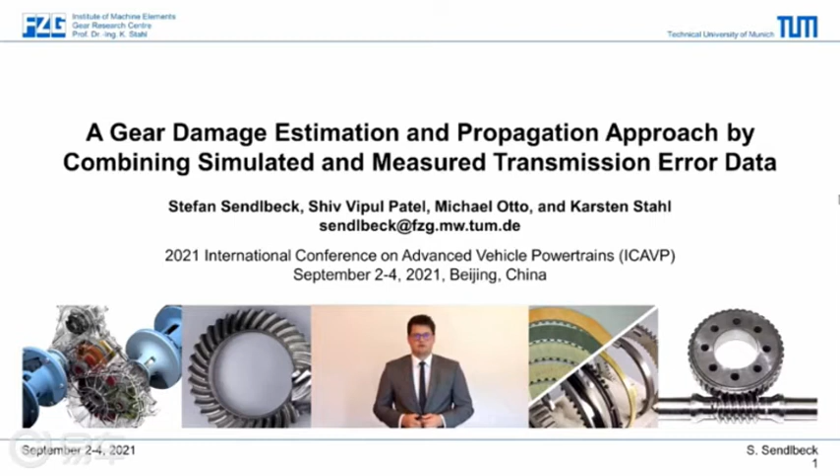Gentlemen, a nice welcome to this year's International Conference on Advanced Vehicle Powertrains. We provide a gear damage estimation and propagation approach by combining simulated and measured transmission error data. The authors are Shiv Patel, Dr. Michael Otto, Professor Karsten Stahl, and myself, Stefan Sendlbeck. We are all researchers at the Technical University of Munich in Germany.

Based on the paper we published, the presentation contains a motivation in terms of gear condition monitoring. It contains the experiment and the measurement data that we used. We will present the simulation concept with detailed steps of damage identification, virtual gear set generation, gear damage growth models, and the transmission error simulation. At the end, I will show you some results and application before concluding everything with a summary.

Whenever we operate a gear system, it can lead to structural changes or any type of gear damage that consequently can lead to undesirable behavior or even to critical failure, which you do not want. So one possible way is to use condition monitoring so that you can implement condition-based maintenance strategies or operation strategies. If you want to do so, however, it is hard to retrieve high-quality run-to-failure data, because it is costly and often not available in large numbers. The result is that condition monitoring models lack the necessary precision for damage evaluation and prediction.

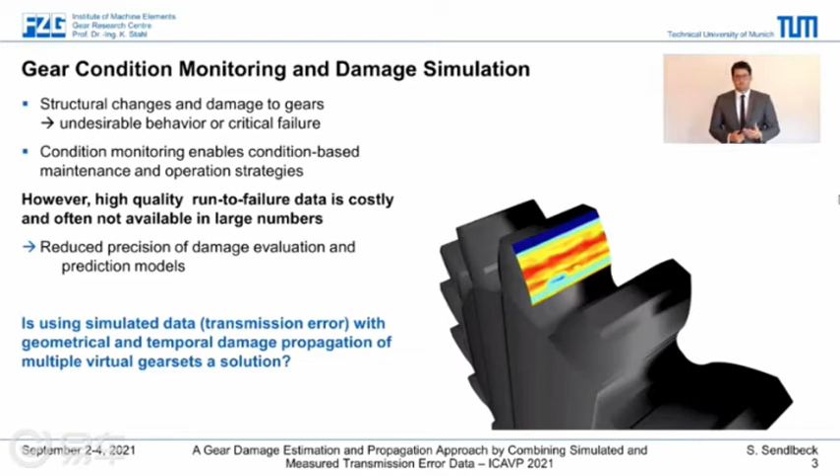So the question is if simulated data is a solution: can we extend our measured data with simulated data and retrieve better models? And the question here is if you can use the transmission error in combination with geometrical and temporal damage propagation models of multiple virtual gear sets to retrieve that.

So what is our experiment and our measurement data? Our data is based on actual gear tests of an FZG back-to-back test rig. And after getting, for example, pitting or micro-pitting damage, we do flank measurements before and after the tests. So we tactilely measure our flanks, and then we calculate the deviation of our flanks from the involute profile. That's what you can see in the image here: the tooth width, the tooth height, and the deviation at every point.

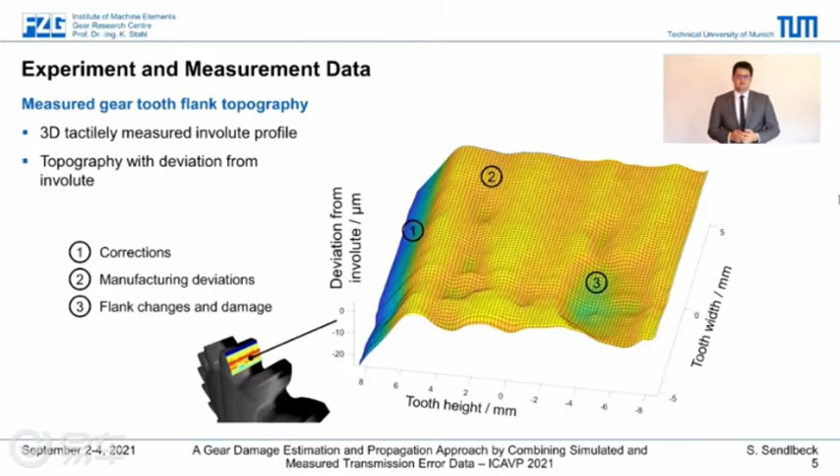What you can see in that image is, for example, marked with number 1, intended corrections, like a tip relief. You can see, as indicated with number 2, manufacturing deviations, or as indicated with number 3, pitting damage, micro-pitting damage, or any other type of gear flank damage, the one that we want to identify later on.

So, what is the simulation concept that we provide with this paper? If you look at the left-hand side of that graph, measurement data: whenever we operate a gearbox, we can retrieve various signals, for example, the measured transmission error. If a damage occurs, we can do a damage evaluation, normally at the beginning and at the end of a test, and then we can correlate the measured transmission error to that type of damage. And of course, we miss everything in between, or it is costly to examine everything in between.

So what we do now is tactile surface measurements at the beginning and at the end, and we use those measurements to simulate the transmission error of those flanks and to generate even more data. And how do we do that? First of all, we do a damage identification in the actual measured data retrieved from tests. Then we generate many virtual gear sets.

We do gear damage growth modeling in terms of time as well as in a geometrical sense, and then we do a transmission error simulation based on that, so we can extend our measured transmission error database with simulated transmission error, and we also have all the data between the start of the damage and the end. That type of data we can use for more precise damage evaluation, more precise damage prediction, and for flank surface reconstruction.

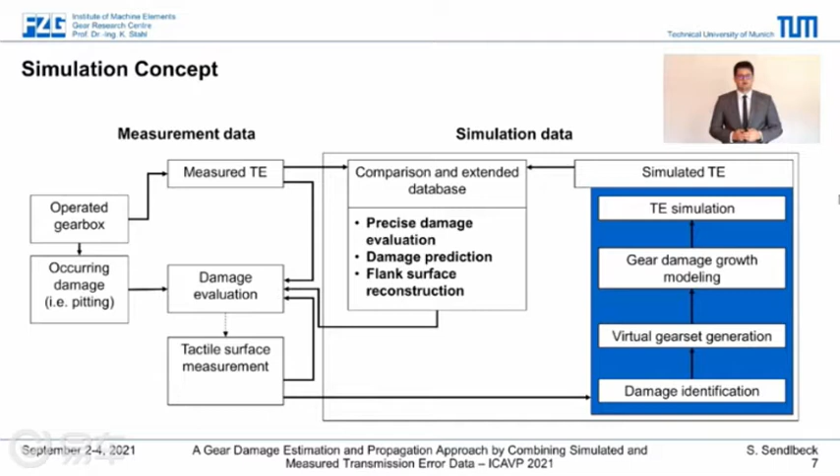So let's go through every step of that simulation concept. The first step is, whenever we measure a flank topography, we want to automatically identify the damage. The example you can see here is again the deviation from the involute profile, and in that topography you can see a micro-pitting damage, and you see our algorithm which automatically detects that type of damage in that topography measurement.

How do we do that? We use a 4-algorithm unsupervised concept with algorithm thresholding. So we have 4 algorithms: Canny edge detection, Otsu thresholding, a one-dimensional Fourier transform, and a one-dimensional Fourier transform with edge detection. And then we calculate the number of algorithms at each position that indicate a damage.

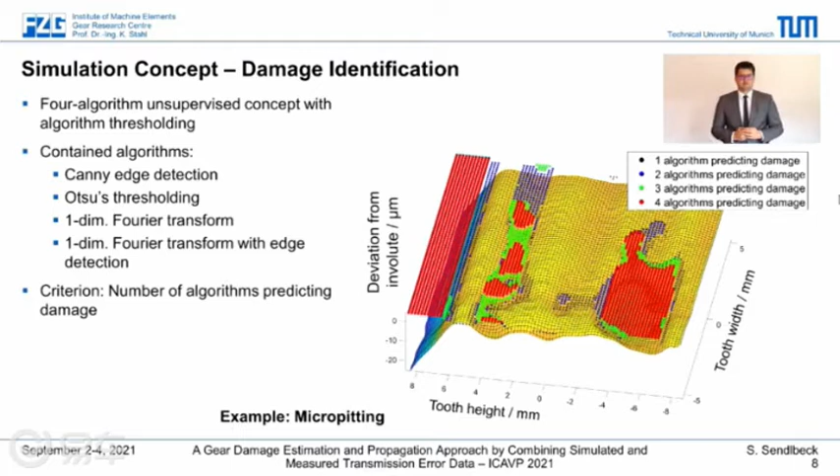And if the number exceeds a user-defined threshold, we mark that point as damage. And as you can see, for example, in red, if all 4 algorithms detect the damage at that position, it is marked as red in the picture you can see here. Of course, on the left-hand side, we see the tip relief, but as we know where the tip relief is, we can neglect that for further processing.

The next step is, based on our measured topographies and the identified damage, we isolate the damage so that we only have the damage, and then we use that damage from multiple different tests and measured topographies to generate even more topographies. Of course, we always have to consider physical properties, which type of damage we combine, where damage can be and where it cannot be. But in the end, we can use a small data set of damage to retrieve a big data set of virtual topographies containing different types, different numbers, and different severities of damage.

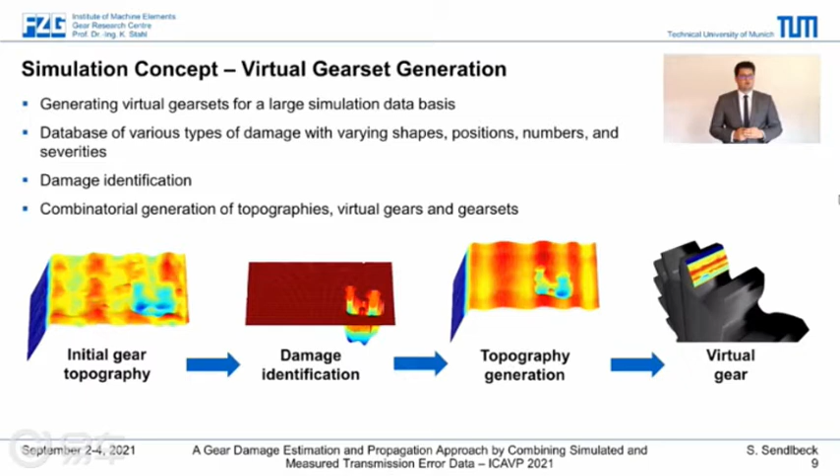And then we can use those topographies to generate virtual gears, with different number of teeth or different shapes. And then we can use those virtual gears to create virtual gear sets, so combining pinion and wheel for even more data. Of course, those topographies are still at the beginning and at the end of a test. So we want to simulate everything that is in between.

And for that, we use our damage in the topography and simulate the damage growth, from a geometrical point of view and a temporal point of view. So for geometrical growth, we use morphological image processing. We use structural elements like a cross or an ellipse, and we use image processing operations like dilation, closing, and opening.

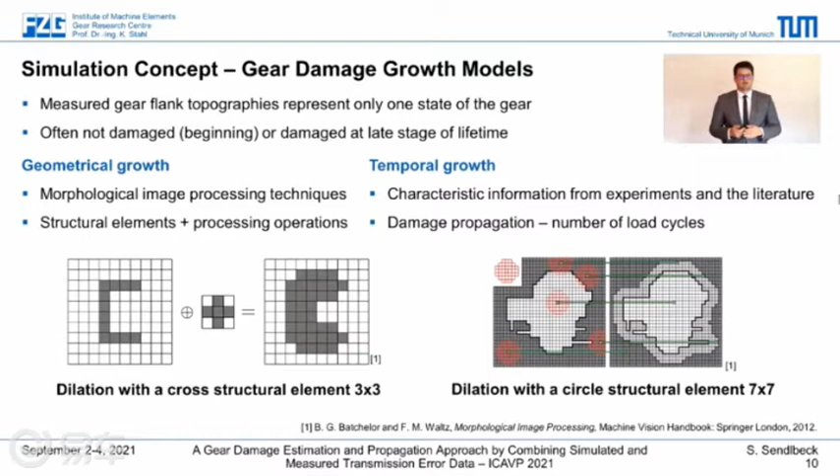For temporal growth, we use characteristic information from experiments and from the literature, and what we retrieve is the damage propagation with respect to the number of load cycles. And if we combine all of that information, we can simulate or interpolate the damage between the beginning and the end of the damage, and then we can use that data to simulate signals. And that's what we do in the next step.

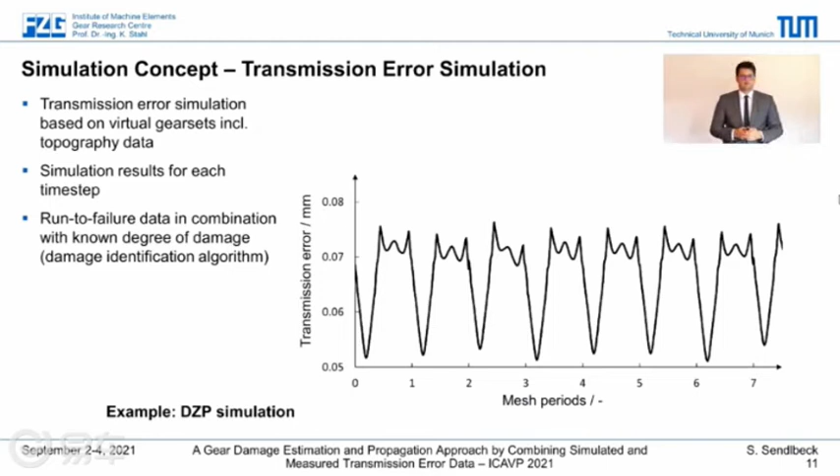So now we use our virtual gear sets and every time step in between to simulate the dynamic transmission error for every time step. And of course, as we do have a damage identification algorithm, we are able to map those signals to the degree of damage at that timestamp. And that's a way how we can retrieve continuous run-to-failure data for condition monitoring that extends existing measured data and also has more data than the actual measured one.

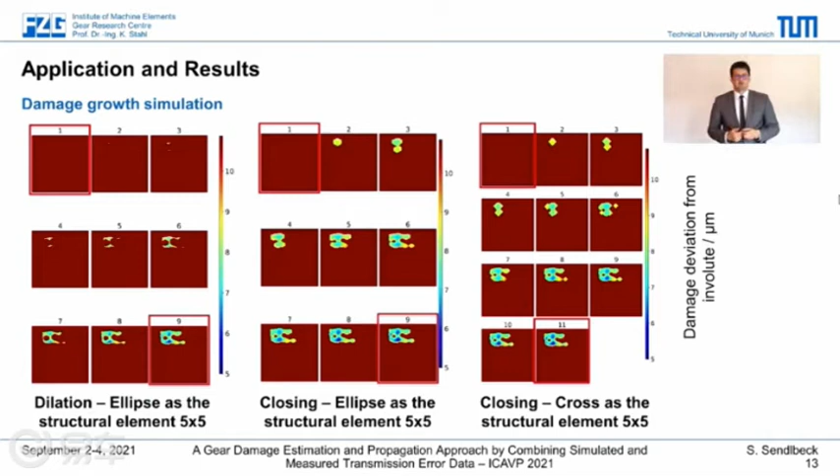And now we can use those images to add our temporal growth. So the time between each time step provided here is not linear, but we have to add our damage-specific growth model, and then we can use those images for our virtual gear set generation and then for our transmission error signal simulation.

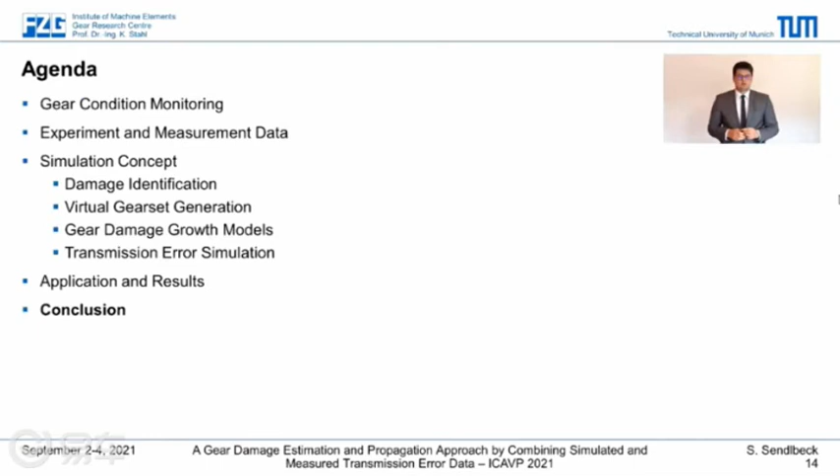So what is the summary of this concept? When we want to retrieve run-to-failure data for condition monitoring, that can be challenging, especially if you want to have continuous run-to-failure data of high quality. That's why we say, okay, we want to extend measured data, especially measured topography data, with simulated data using morphological image processing, using temporal damage growth models from the literature, and also using a dynamic transmission error simulation approach.

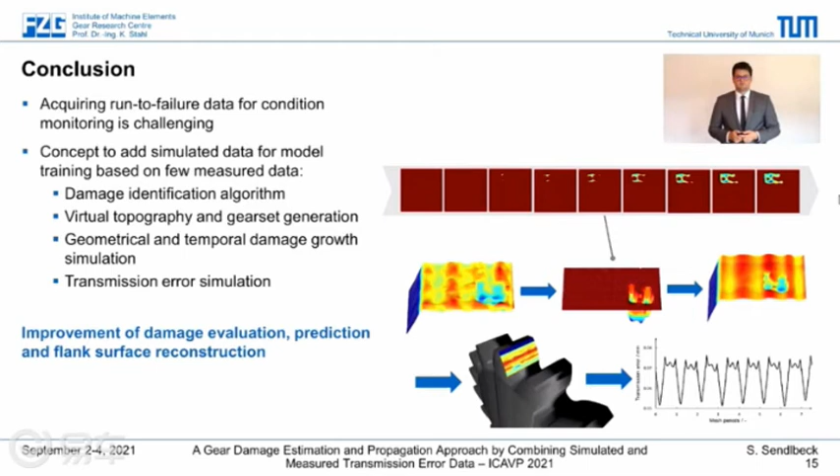So our approach, based on only a few measured data, can result in many simulated data, and it contains a damage identification algorithm, a virtual topography and gear set generation, a geometrical and temporal damage growth simulation or modeling, and at the end a transmission error simulation. With our approach, we can extend our database, and therefore it makes it possible to improve damage prediction, to improve damage evaluation, and even it enables flank surface reconstruction.